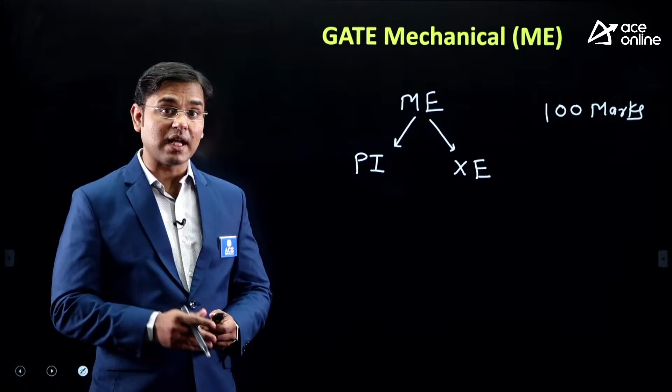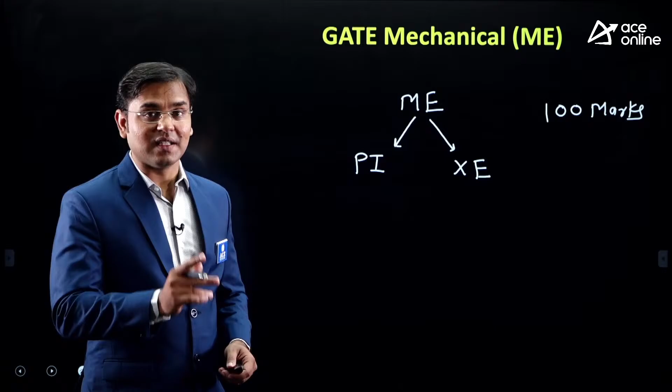The mechanical student can appear from PI as well as XE. I always tell my students, don't give the GATE examination from only one branch. Many students make the mistake of giving GATE from mechanical only, but they need to give the exam from both branches, ME as well as PI, or ME as well as XE. You need to go for two examinations, because giving only one exam is a little risky. You have two options.

Now you understood about all the branches. Now let's see, for mechanical, what is the subject-wise weightage for the GATE examination. This is a multiple choice question examination, total 65 questions are there, for 100 marks, you sit on the computer and give the exam. 65 questions are there, and what is the syllabus out of 100 marks?

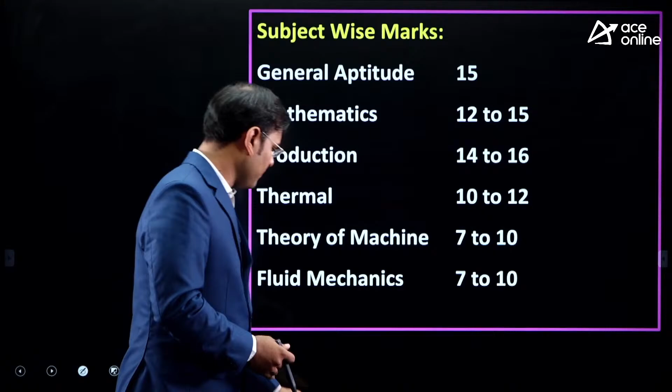You can see that aptitude is of 15 marks. General aptitude, what does that mean? Some English is there and some aptitude is there, and that combined weightage is 15 marks out of 100.

So just consider this: general aptitude, that is English plus aptitude, is 15 marks, and mathematics is also 15 marks. Then out of 100, the remaining marks is 70 marks. And my students, this 70 mark syllabus is the technical syllabus, the syllabus of mechanical engineering, your technical subjects which you are learning throughout your degree.

The first important subjects are mechanics, strength of material, theory of machine, thermodynamics, IC engine - a number of topics are there, manufacturing process 1 and so on. All this syllabus is of 70 marks, that is the technical syllabus, and now we have to discuss the respective subject weightage.

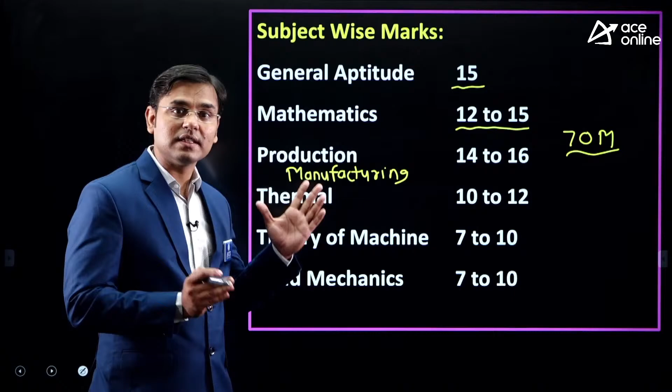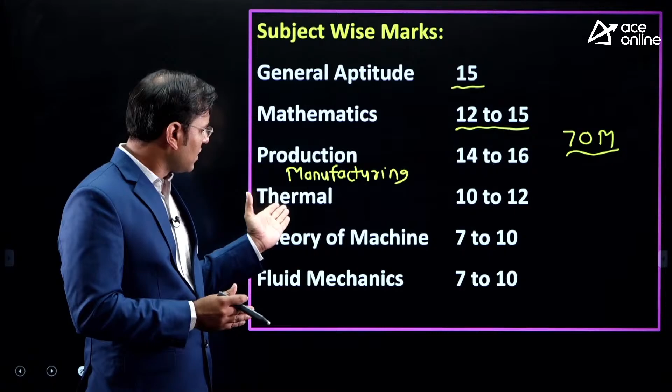In this session, we have to see in detail about the weightage and what type of questions they are going to ask in the manufacturing subject, for mechanical engineering as well as for students doing their degree in production and industrial engineering or simply production engineering. I will tell you how to study, how to prepare, and what will be your preparation strategy. And next, let's see the next subject, that is thermal - a very interesting subject.

In engineering also, some students, like in thermal subjects, understood that it is a part of thermodynamics. Thermodynamics, IC engine, refrigeration are the topics, and the weightage is 10 to 12 marks, very good weightage.

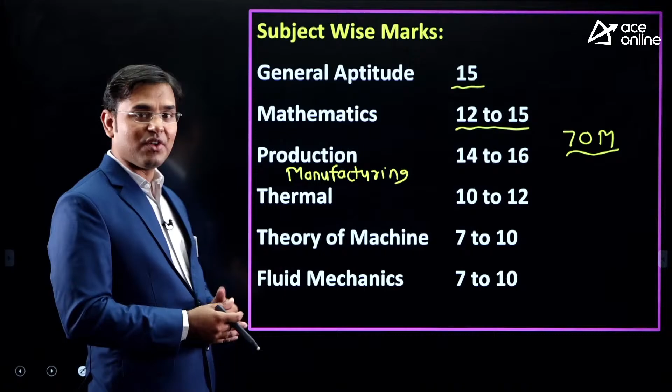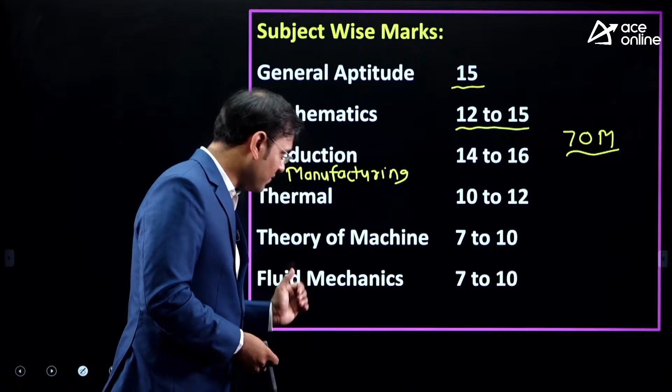Next is theory of machine, a very big subject - theory of machine 1, theory of machine 2 - total subject combined here, and that weightage is 7 to 10 marks. The next is fluid mechanics, weightage is 7 to 10 marks, and in that fluid mechanics the part of turbine is also there, the water turbine part is also there.

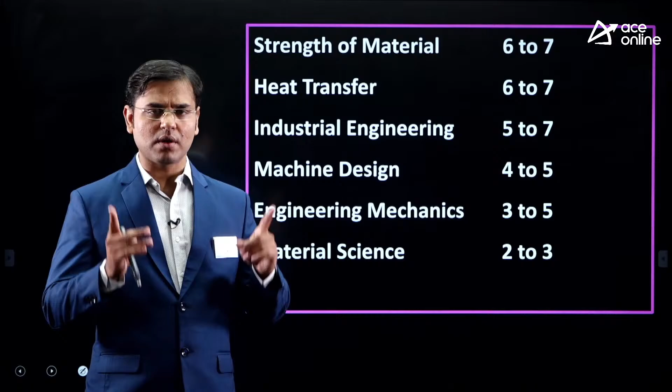The next is strength of material. Even though I am not the teacher of strength of material subject, this subject is very important for GATE examination. You can see the weightage - small subject, but the weightage is very good, as well as it is important after graduation for mechanical as well as civil engineering students. Very important for interview purpose. Either you appear for GATE exam or not, strength of material is very, very important for interview purpose for mechanical, production and industrial as well as civil engineering students, right?

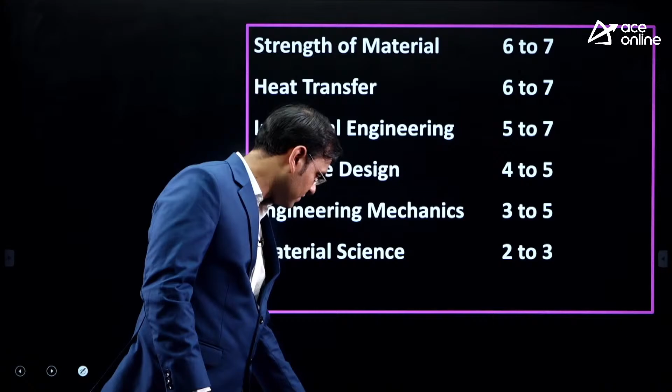The next is heat transfer, very small subject, the weightage is good, 6 to 7. Industrial engineering is a part of operation research subject. Many students learn operation research subject in their graduation, and the weightage is 5 to 7 marks. Next, machine design, 4 to 5 marks weightage. Engineering mechanics, the first year subject, 3 to 5 marks, and material science, 2 to 3 marks. Very interesting subject, material science is also there.

For the preparation of manufacturing, our today's topic is the preparation strategy for manufacturing. Preparation strategy for production subject, and for this subject, two subjects are important. First, you must have the knowledge of material science, then it is very easy to understand the manufacturing subject. You must have the knowledge of material science, then you can study very well this production subject.

Now see the very basic question for the student: which material is best for preparation? Which material we can use? This is a very basic question of the student, either for manufacturing subject or any other subject.

The first is classroom notes. Whatever I am teaching in class, whatever all the ACE faculty are teaching in class, these classroom notes are very, very important. All the teachers are giving very nice content, very nice notes, and the student needs to revise that notes a number of times. Either there is a GATE examination or an engineering services examination - engineering services examination, which is under the UPSC - we are teaching for that also, GATE as well as ESE examination.

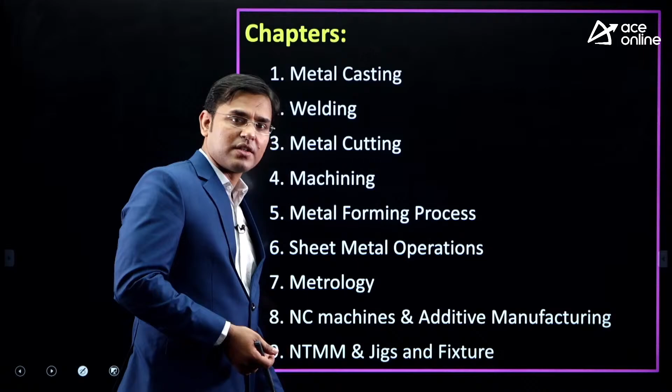Either it is mechanical or production and industrial engineering branch, here is the list of 9 chapters. You can see metal casting, welding, metal cutting and machining, metal forming, sheet metal operation, metrology, NC and CNC machines, and additive manufacturing, which is the newest topic added in GATE 2021.

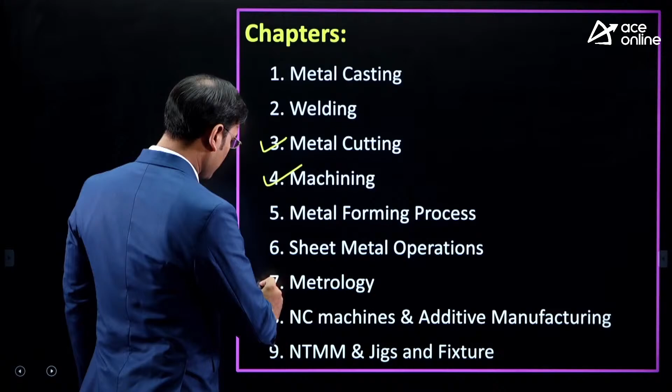And finally non-traditional machining methods and jigs and fixtures. Out of that, the preparation strategy of metal cutting, machining, and metrology subject - metrology is already covered in last month. Now the remaining 6 chapters' preparation strategy we have to discuss in today's session. One by one we will go through all 9 chapters. Again, the weightage for these 9 chapters is 14 to 16 marks for mechanical, and for production and industrial engineering it is almost 28 marks.

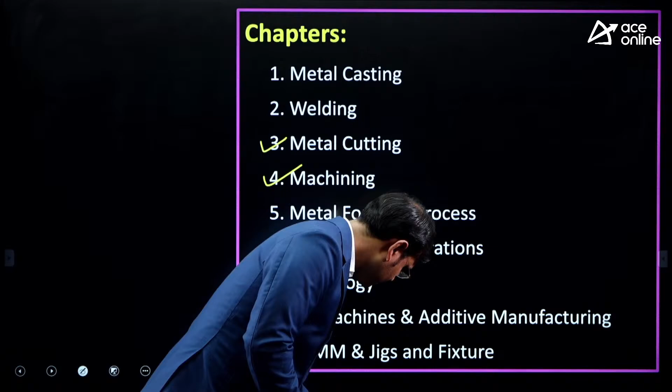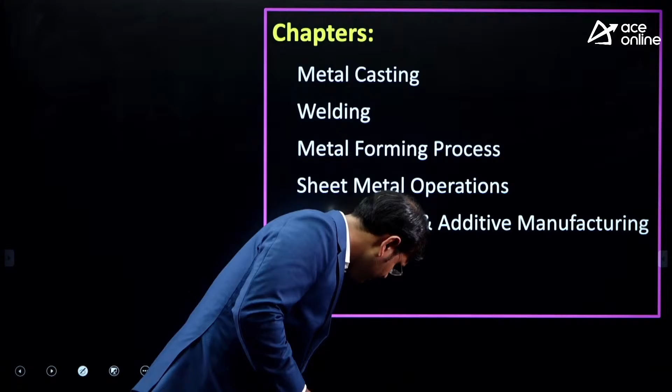Now let's see the list of all the chapters here. We have to discuss the preparation strategy for these 6 chapters. Now, among all these chapters, let's look at the first chapter, that is metal casting.

In the metal casting chapter, we simply take some solid metal and put it in a furnace. We convert that solid metal into liquid metal and pour it into a mold. After pouring into the mold, we wait for solidification. Because of heat transfer, that molten metal converts into solid material. Then, by breaking the mold, if the mold is made of sand, we can take out the casted component.

That metal casting chapter requires almost 20 hours to teach. Its weightage for GATE mechanical is almost 2 marks, and for PI the weightage is almost 4 marks.

In engineering examinations, students are studying only theory. But will they ask theory questions or numericals in the exam? That is a very big question. When we teach a chapter, we teach a lot of interesting theory, and along with that theory we also teach numericals. In this manufacturing subject, numericals are asked in the examination.

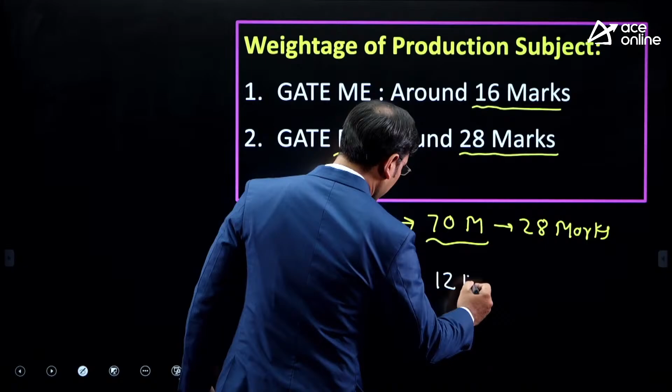Without the basics of theory, you can't solve the numerical. Hence, what I tell students is: study the basics, study the theory, and then start practicing a number of numericals. The total weightage here is 16 marks, and unbelievably, out of that 16 marks, around 10 to 12, or almost 12 marks, is weightage for numericals, with remaining 2 to 3 marks, maximum up to 4 marks, for theory.

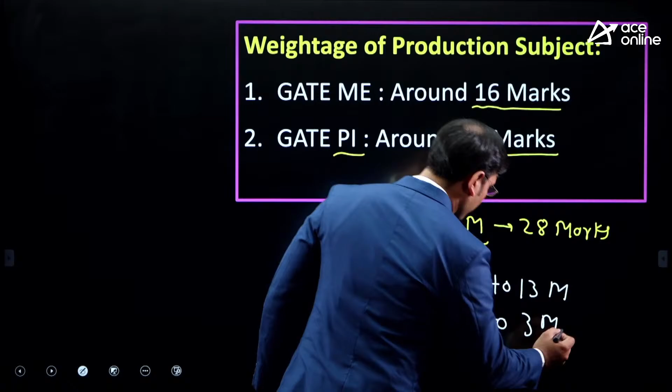They can do a 12 mark numerical and 4 mark theory, or a 13 mark numerical and 3 mark theory, but there's maximum weightage for numerical. One important thing: look at the number of reference books for this subject, but you still won't find the numericals there. For production and manufacturing subjects, numericals are not available in many reference books, but GATE is asking numericals, numericals, numericals. This high weightage of numerical is not only for manufacturing, it's for all subjects in GATE.

In the casting chapter, there are hardly 4 to 5 simple formulas. If you revise those formulas, they will ask either a 1 mark numerical or a 2 mark numerical based on them in the metal casting chapter. This is the first chapter we teach in this subject, and it's very interesting, taking around 20 hours. The same syllabus applies for GATE mechanical as well as GATE production, and if you study those 20 hours, you can put 2 marks in your pocket.

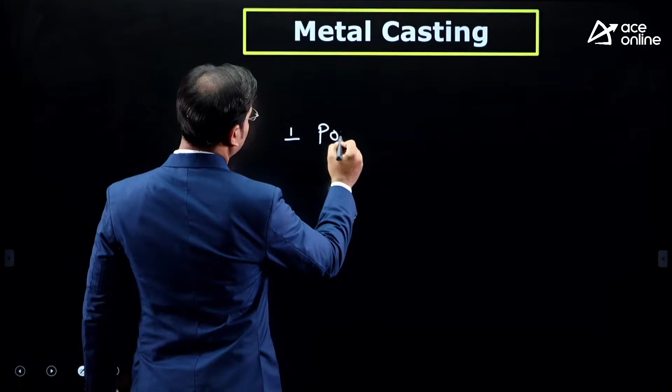How to study for metal casting: there's more weightage for numerical, but theory is also important. Let me tell you some points here. In this chapter, the first important formula is the pouring time formula. Second, there's the formula for solidification time.

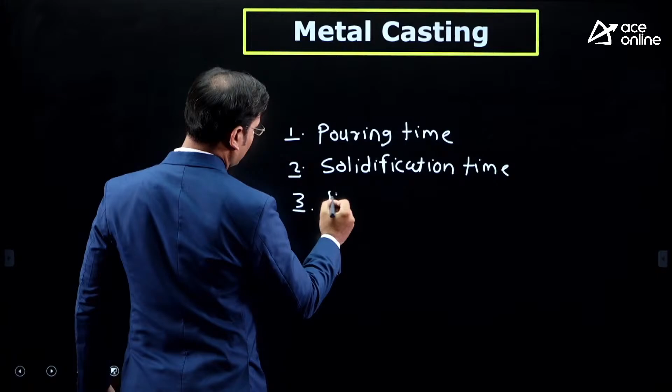Solidification time, and the third one is riser design. These three topics are very, very important for numerical.

And what about the theory? All the content is important for theory, whether it is mechanical or production. The same type of question they are going to ask on the casting chapter, whether it's mechanical or production and industrial engineering. But in PI, sometimes some tough numericals are also given for production and industrial engineering.

These 3 topics are very important for the numericals. And what is the theory? Whole chapter theory is required to study to get theory marks. This was the preparation strategy for metal casting.

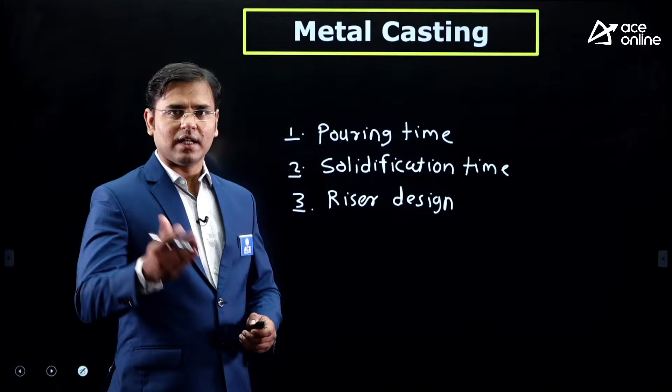Now see the welding chapter. This welding chapter is very, very tough chapter. Why is the welding chapter very tough?

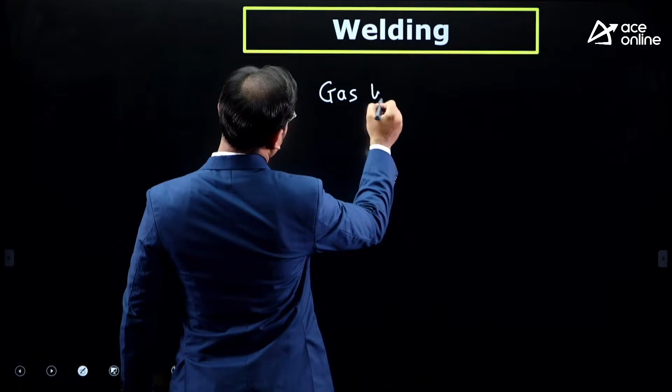There are a number of welding processes, such as gas welding. In that, only one gas welding is very, very famous, and that gas welding is known as oxyacetylene gas welding. Oxyacetylene gas welding is very, very important. A number of times in the GATE examination, they asked a 1 mark theory question on oxyacetylene gas welding. Number of times they asked this, so gas welding is important.

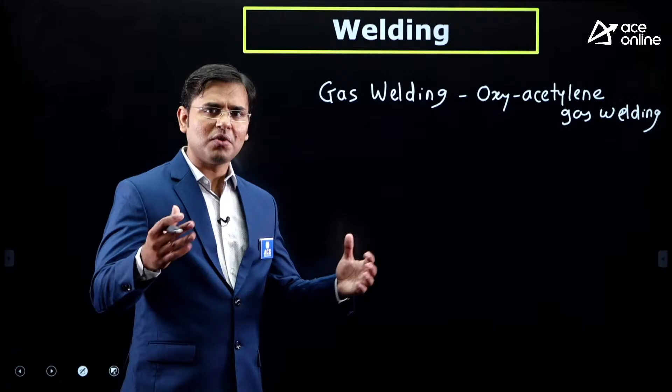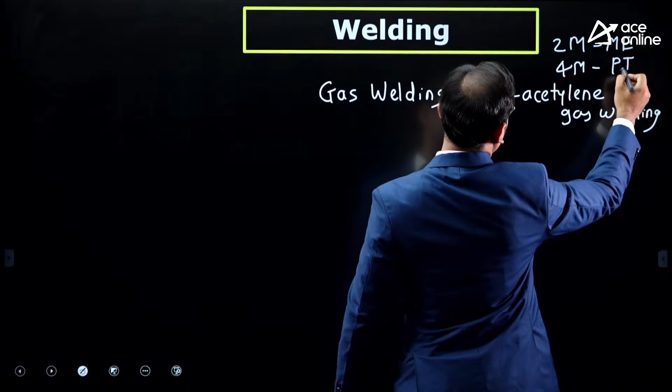Now the question is, sir, what is the weightage of the welding chapter? Same as the casting chapter, the weightage for welding chapter is 2 marks for GATE mechanical, and for production around 4 marks weightage. It may be 4 to 5 or 3 to 4 marks weightage for GATE PI, production and industrial engineering. This is the weightage.

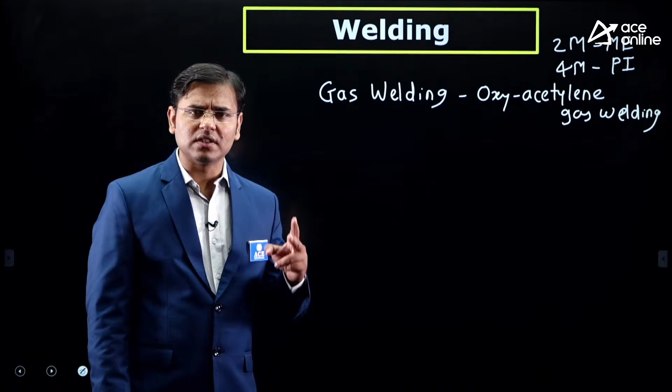In that 2 marks, same as casting, they can ask a 1 mark theory question and 1 mark numerical. What I'm saying is the 1 mark theory question and 1 mark numerical they can ask for mechanical, or directly they can ask a 2 mark numerical. And in every examination, they are asking the numerical on the welding chapter.

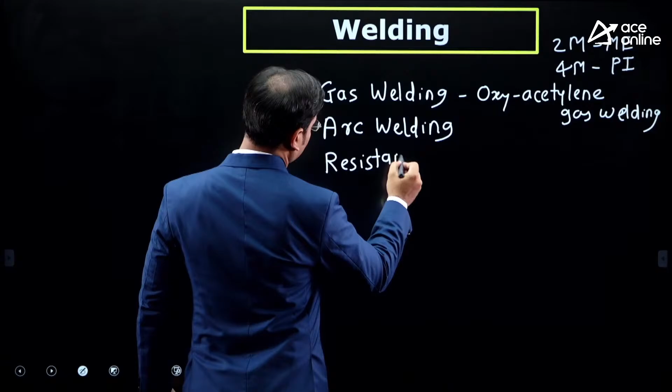Either there is arc welding or resistance welding. Out of these 2 weldings only, they are asking one numerical. Every year, every examination, they are asking that numerical for mechanical.

And if we have to speak about production and industrial engineering, in some examinations they ask the question on arc welding as well as resistance welding. Welding chapter is very, very important. Only 2 types of numericals are there.

This chapter also requires almost 20 hours to teach for me. Its weightage is approximately 2 marks. And from the starting of GATE examination, every GATE exam, they are asking the welding question. That's why it is very important.

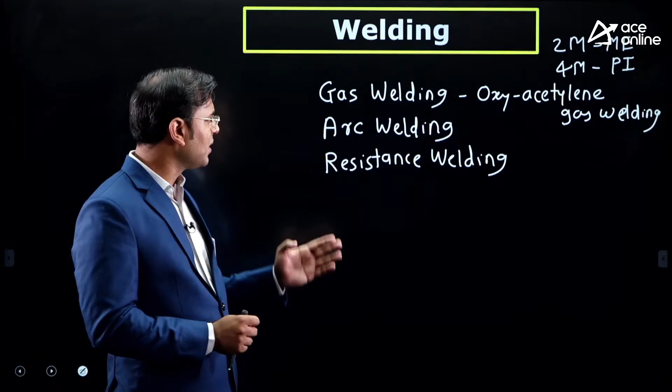I want to tell you that in the welding chapter, you need the knowledge of electrical engineering subject - the knowledge of voltage, current is required. Once you understand that, it is very easy, not that difficult, then easily you can solve the numericals of arc welding as well as resistance welding.

What I said is they will ask the numerical either on arc welding or resistance welding, but not only numerical - sometimes they can ask the theory on that welding also. Now again there are some topics in welding.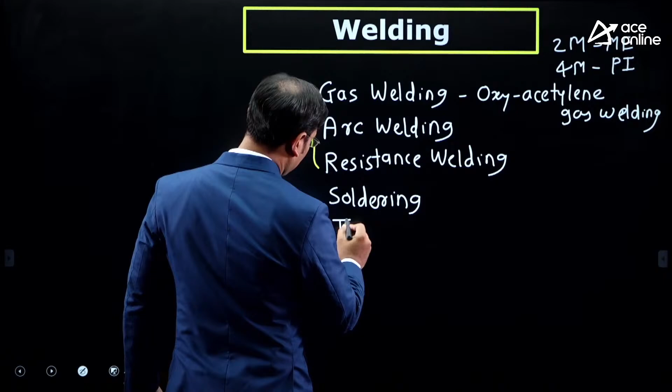Some topics are there, just like soldering, brazing and braze welding - this is one of the topics. The next one is Thermit welding, which is also one of the topics.

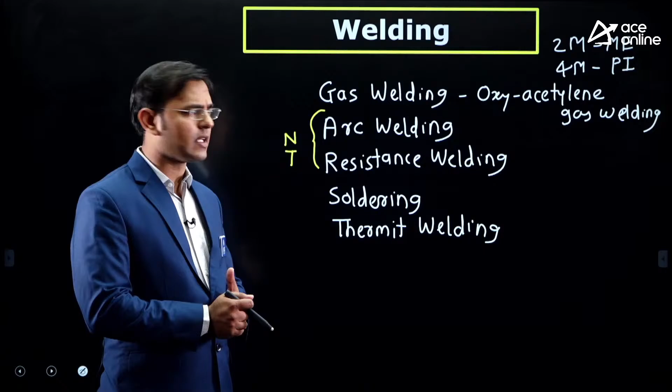Thermit welding, soldering - such 3-4 topics are there, from which they can also ask a 1 mark theory question. But there's great possibility on gas, arc, resistance - these 3 are very important, in which they can ask the numerical. That is all related to welding. Some formulas - arc welding has 2-3 formulas, and in resistance welding there's only a single formula. Very easy to get the 2 marks in the welding chapter.

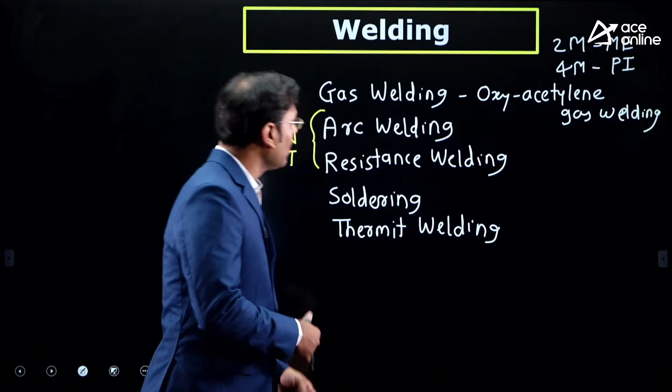Now we are discussing the chapters one by one, and after all the chapters there is one combined strategy to study all the topics, how to revise all the topics - that I will also tell you at the end of the lecture.

Now see, metal forming - this metal forming is very, very important.

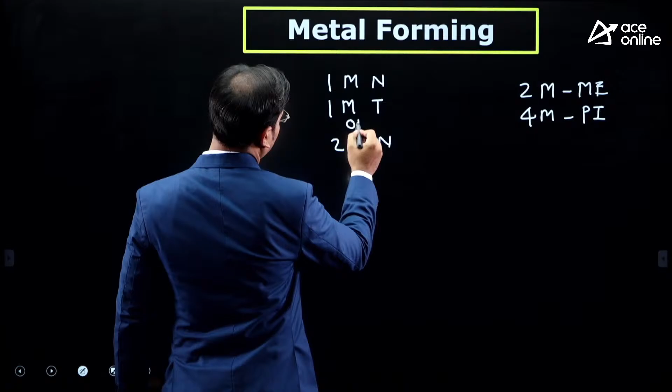That metal forming is a very important and very interesting chapter. Number of methods are there in the metal forming chapter, and the weightage is around 2 marks for GATE Mechanical and around 4 marks for GATE PI and Production and Industrial Engineering. In metal forming, they can ask a 1 mark numerical, 1 mark theory question, or they can directly ask a 2 mark numerical. Yes, anything they can ask.

Again you can see that the weightage of numerical is more here.

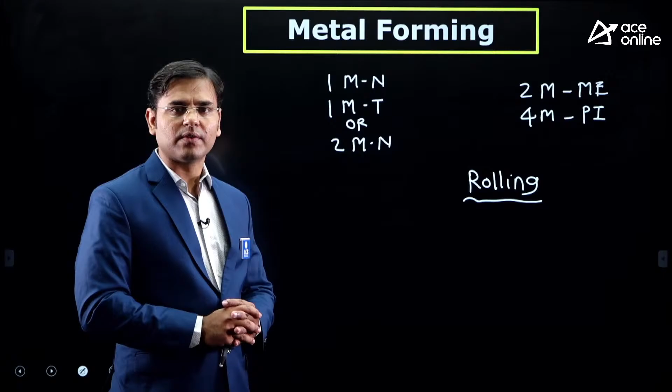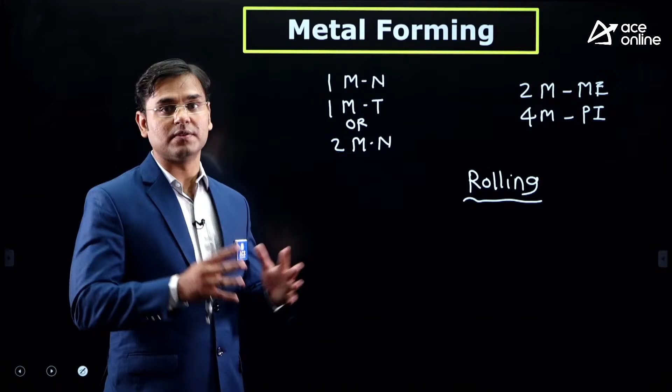In metal forming, the important topic is the rolling process. Rolling is a very important topic on which there is more possibility to ask a question. In metal forming there are various processes, such as rolling, wire drawing where we form wires, tube drawing where we form tubes, extrusion where we form pipes and rods, and forging. All these methods are important, but rolling has a big possibility to get a 2-mark question.

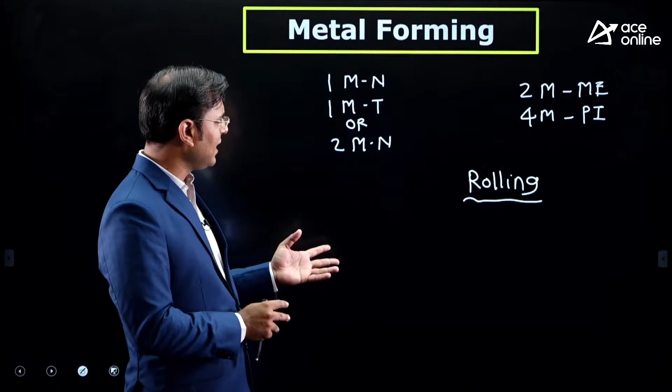But in many examinations, they also ask questions on extrusion, and they also ask questions on forging.

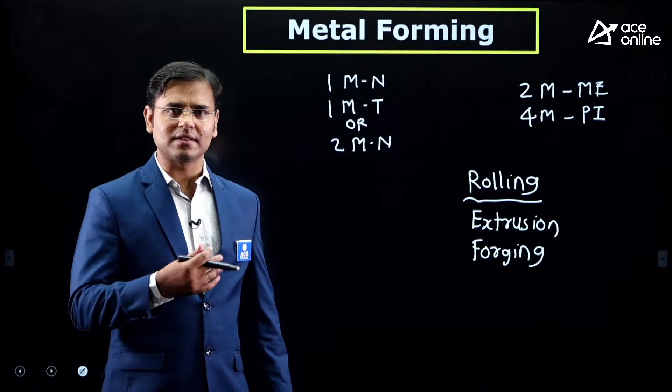And when I am speaking about forging, I remember the connecting rod. The connecting rod is a very important component, which we use everywhere in bikes, trucks, and buses. That connecting rod has very high strength, and it is made by the forging process only.

So this is the metal forming chapter. You got everything here.

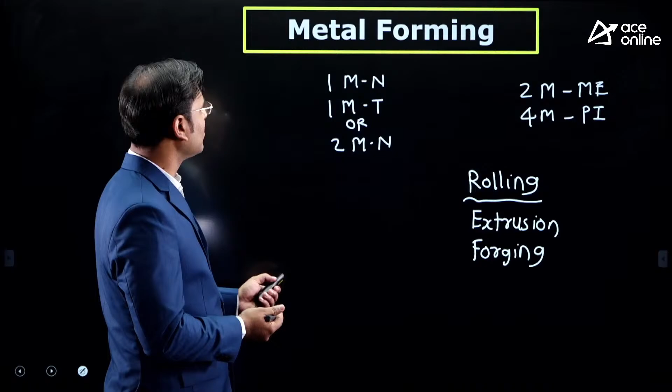The next chapter is sheet metal operations, meaning punching and blanking operations. I am writing this as a separate chapter here, but metal forming and sheet metal operations can also be combined. On this chapter too, they can ask a 2-mark numerical, 1-mark numerical, or 1-mark theory question. Combined, some examinations don't ask this question at all, because it is part of the metal forming chapter only.

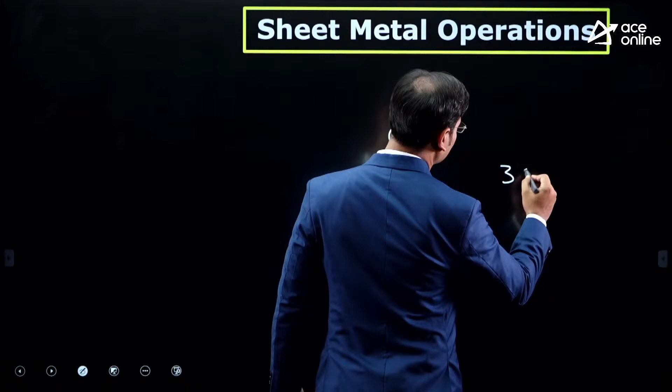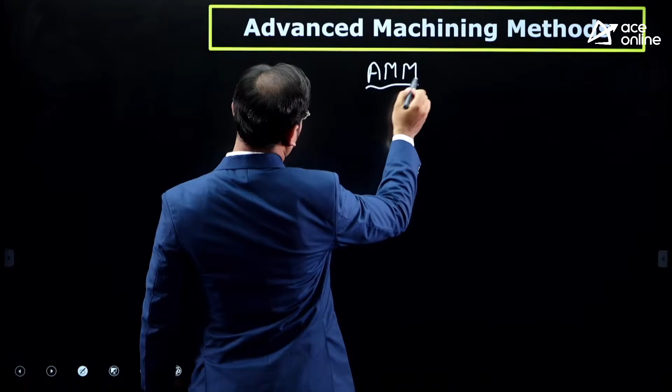Now the next chapter is advanced machining methods, that is CNC machines. Firstly, NC machines were developed after World War II, and then CNC machines were developed. In the syllabus for advanced machining methods, NC machines are there as well as CNC machines, and some part related to automation is there too.

Robotics is not in the GATE exam till now, but here, do you know what I am teaching the student? I am teaching how to remove the human being from the machining zone, meaning how complete automation is possible in industry. It's a very small chapter, but very important chapter.

The weightage is very good, 1 to 2 marks. This chapter is very small, but for GATE Mechanical and PI the weightage is almost twice, that is 2 to 4 marks, or 2 to 3 marks.

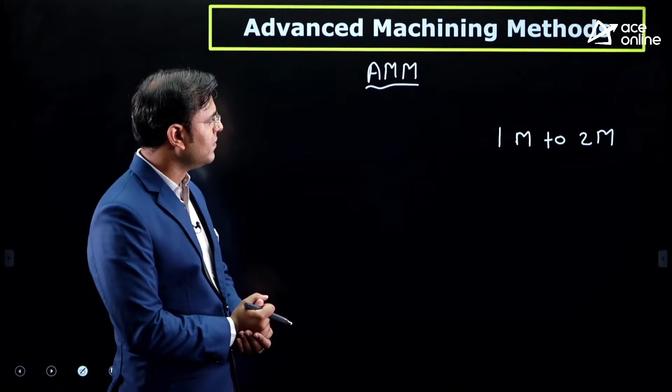Yes, now see here, in advanced machining methods, what I said, what I am teaching, is what is in the syllabus.

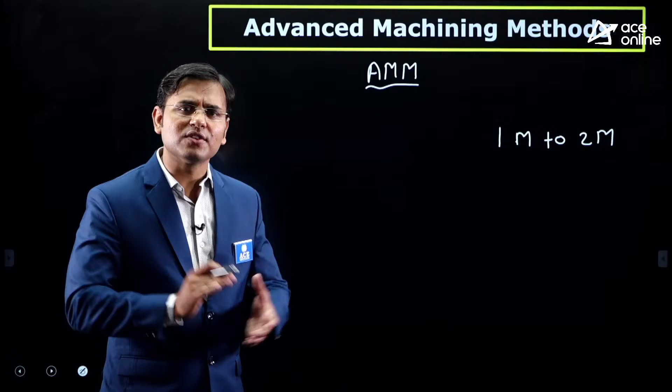In the syllabus, there's a topic on how to throw the human being out of the machining zone. I can't say whether it's good or bad, but I am teaching this chapter where we throw the human out of the machining zone. In that, you have to learn CNC machines, and very nice, easy numericals are available. Even a 7th or 8th standard student can solve these numericals. There are 1 mark and 2 mark numericals, and definitely I'm telling you, with minimum effort you can study this chapter.

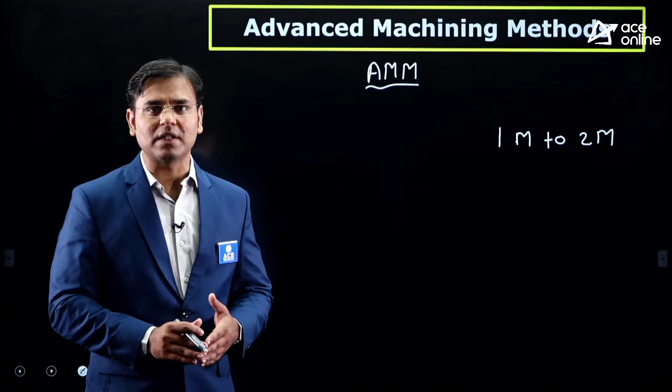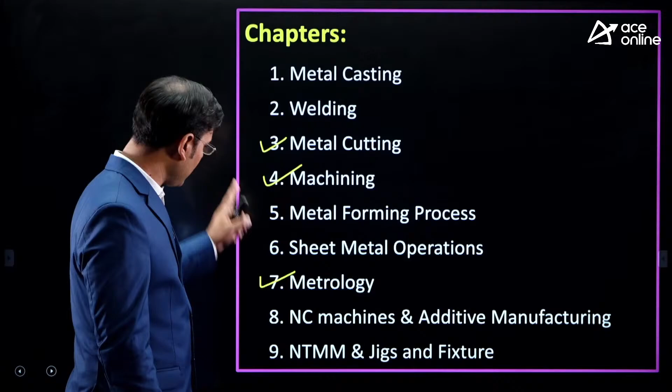Minimum effort as compared to all production engineering topics, as compared to all production subject topics. I showed you the list of total 9 chapters, and of those 9, this is a very small chapter. The topic is NC machines, or we can also call it advanced machining methods - these are the newest developments, and you'll see programming too. Initially we worked on lathe machines, then CNC machines were developed along with programming. In engineering, programming is very tough, but in the GATE examination, big programs are not there - very small, one-line programming is there. That's why this topic is very easy, very small, and the weightage is also very good.

So first there are NC machines, then second, CNC machines, then third, related to programming and automation. In this chapter, programming and automation covers all of that.

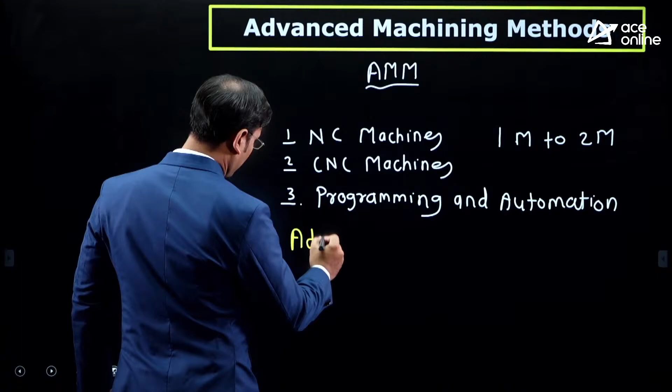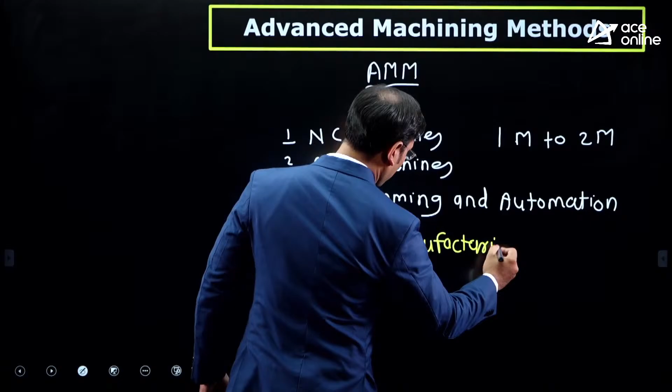But now, a new topic has been added in GATE 2021. The name of that new topic is additive manufacturing. Just believe that when it was added, they added it in the GATE 2021 examination only.

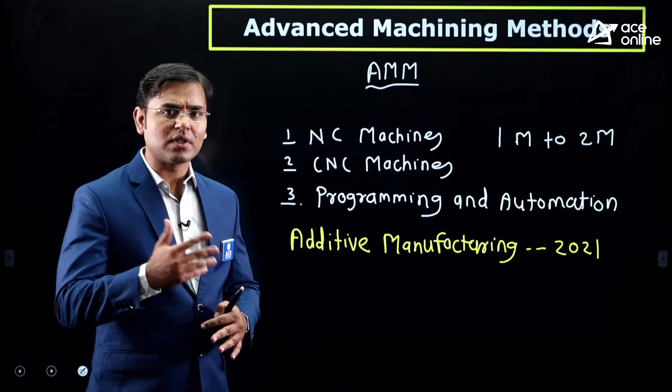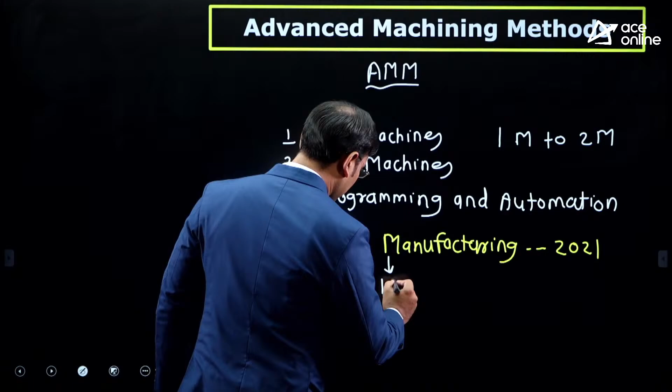But in GATE 21, they didn't ask any question on additive manufacturing. In GATE 22, for both mechanical and production and industrial engineering, this topic was added. For mechanical engineering, there were 2 papers - one morning session, one afternoon session - and in both sessions they asked one question, a 1 mark theory question. Only theory is there for additive manufacturing. There's 50% possibility, or I'd say more possibility. Hardly 6-7 small topics are there, and from those small topics they can ask a 1 mark question on additive manufacturing.

For additive manufacturing, till now only theory is available - no numericals are available, only theory questions. This is because it's a very recent topic. In all mechanical engineering subjects, if someone asks what is the newest development, the newest research, that research is additive manufacturing. In all of mechanical, production and industrial engineering, this is the most recent topic, and in our country, some NITs have specially started an MTech branch in additive manufacturing.

This is the most recent topic for mechanical engineering students - additive manufacturing. The patent and method development started around 1985, hardly 35 years ago, and it's still in the development phase. The research is still going on, so the number of numericals are not available, but there's a big possibility they can ask a theory question.

So I am writing the total weightage around 2 marks. They can ask a 1 mark numerical on NC, CNC or programming - very easy, all programming is very easy, and NC, CNC machine numericals are also easy. With 1 mark, they can ask an additive manufacturing question, or simply a 2 mark numerical, or 1 mark theory and 1 mark numerical.

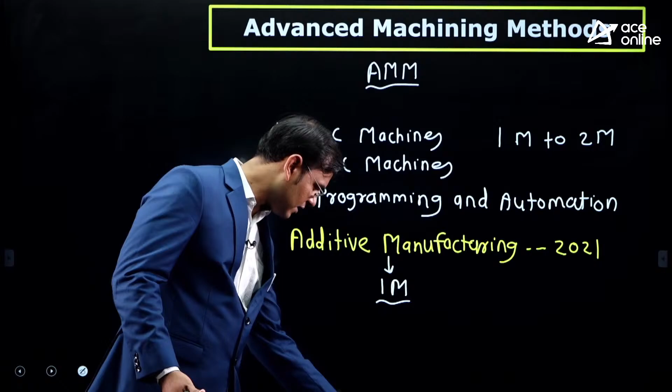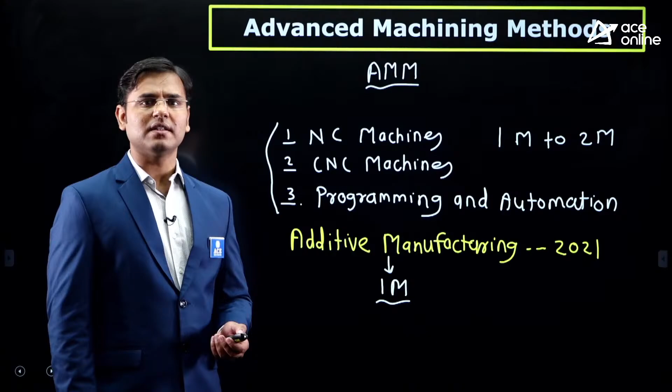Now see the next topic, non-traditional machining method. Traditional means old, non-traditional means newest. Now there is a big confusion between these two chapters: advanced machining methods, which include NC, CNC and additive manufacturing, and the non-traditional machining methods.

As you learn in mechanical engineering, there are a number of methods. I will tell you the names so you can remember them: ultrasonic machining, electric discharge machining, electrochemical machining, laser beam machining, and electron beam machining. All these 5-6 methods are the non-traditional machining methods, also called non-conventional machining methods.

On this chapter there is a strong possibility of a 1 mark theory question. This chapter is also very small, but the weightage is at least 1 mark. Sometimes they can ask a 2 mark numerical directly, or a 1 mark numerical, but there's a big possibility of theory questions.

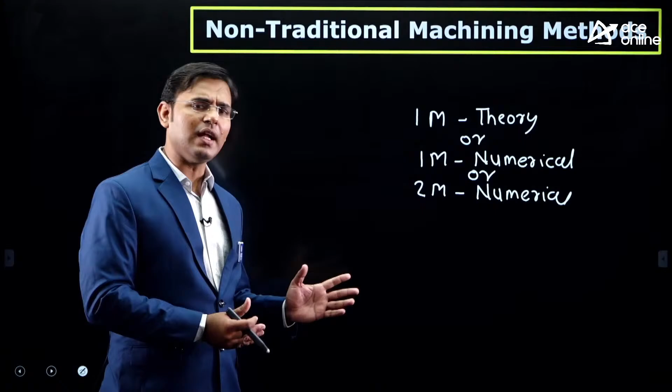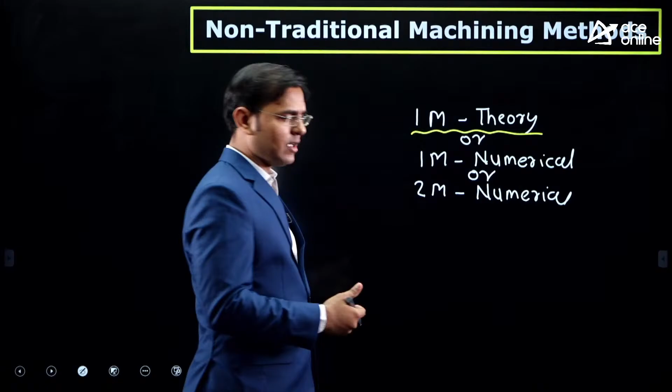This is a very small chapter but the weightage is very good. They started asking numericals only in recent times, in the last 10-12 years. Before that, only theory questions were asked in GATE. Now sometimes they ask 1 mark or 2 mark numericals as well.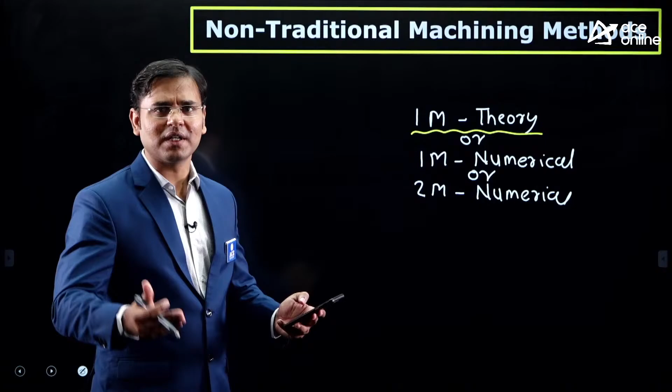Now many students have a question, sir, what is the difference between... okay, I got a very nice question here. Please wait, student, after 5 minutes I will give the answer to your question. In the same way, others can also ask me questions. If you are asking questions, I am very happy to give you the answer, as much as I know I will tell you all. Yes, other students can also ask me questions here.

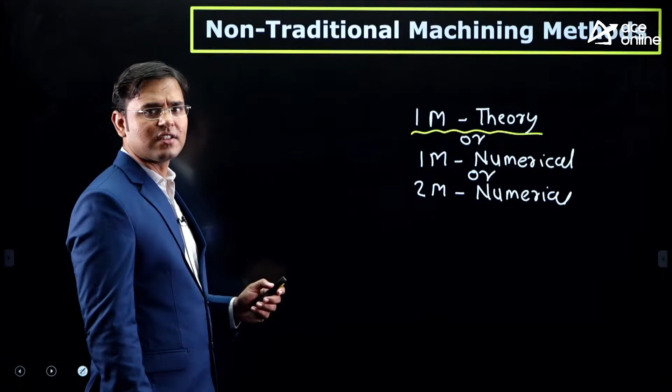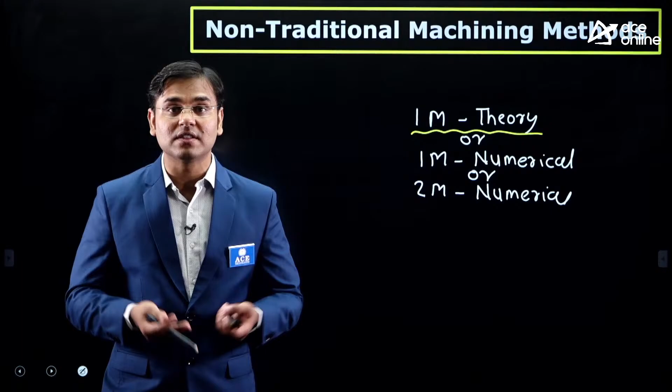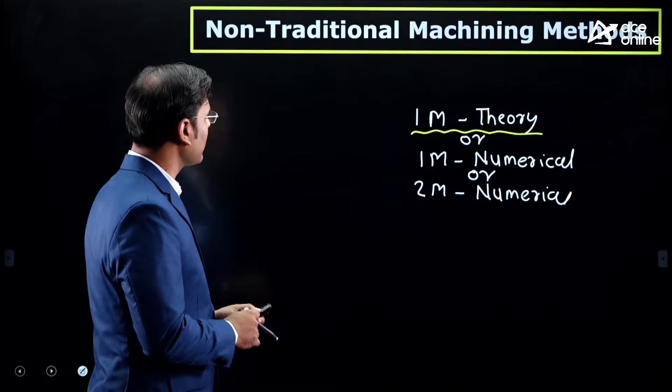Yes, this is all about non-traditional machining methods. Now I discussed all 6 topics - what is important, what is not important, all the things. You can again watch that video if you need some information from here.

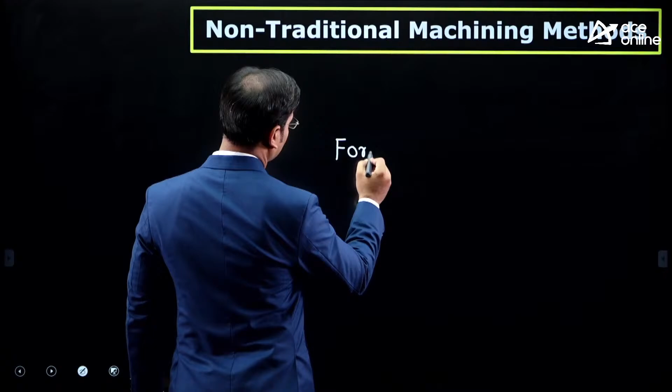Now one important thing I want to tell you for the GATE examination: just see the formula revision. Formula revision is the most important thing in the GATE examination.

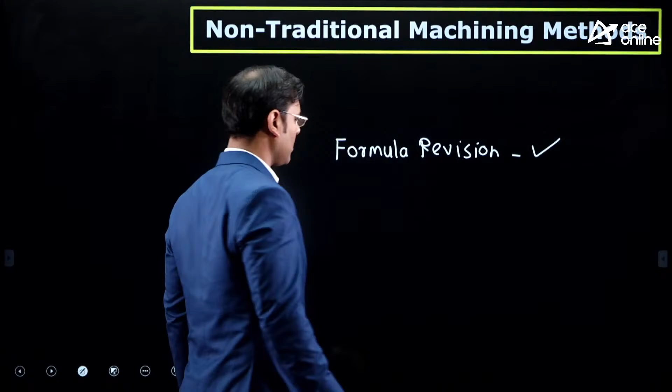Once you studied the casting chapter, you need to note down all the formulas present in that chapter in a register, and revise them on a daily basis. Second chapter is welding - when you study it, write down all the formulas on one page in a small notebook. For every chapter you need to write down the formulas, and revise them daily, in the morning or afternoon time, even after lunch.

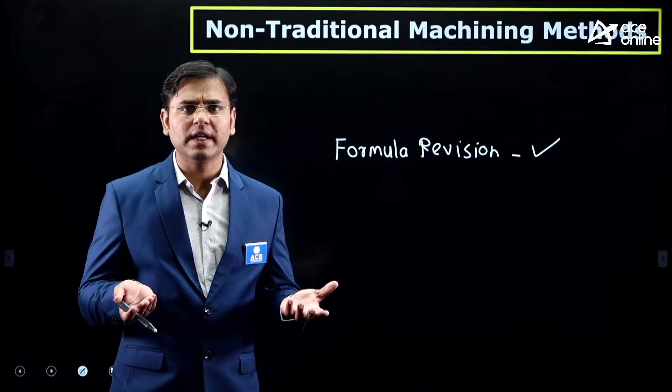While walking you can give the revision of that formula, you can remember that formula, because in this exam, any subject, the formulas are very important, and you must revise that formula on a daily basis. If you are not revising the formula, do you know what happens in the examination? You will write the given data and you will see here and there, thinking I forgot that formula. Without formula there is no GATE examination. Hence you must revise all the formulas.

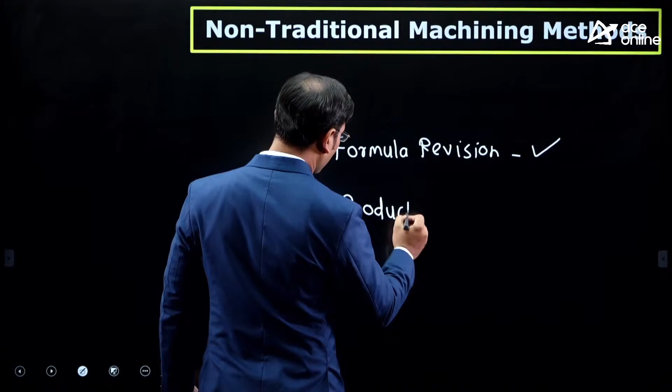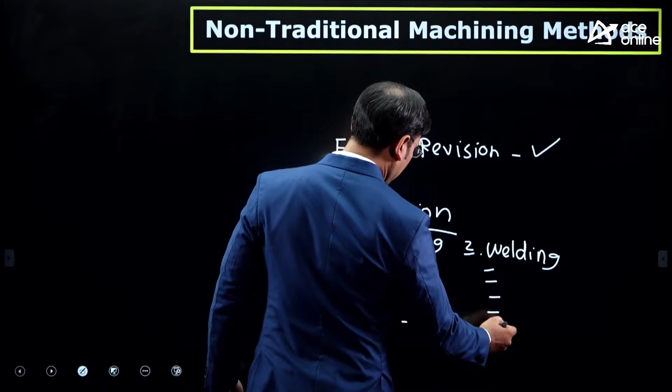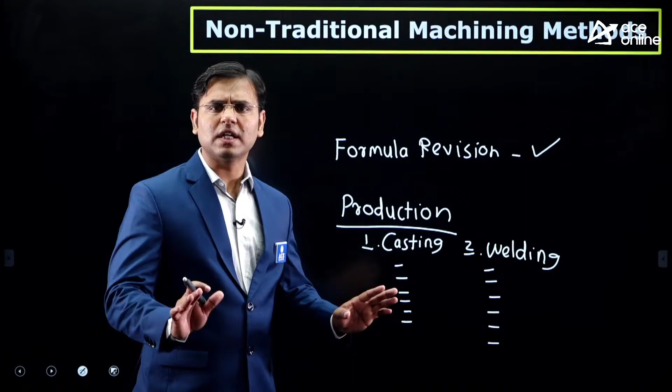Then you need to make one small notebook for the total production subject, and you have to write one by one. The first chapter is casting. After learning casting, you need to write all the formulas of the casting chapter. Then the second one is welding, and in such a way there are total 9 chapters, and for welding also you need to write the formulas. First you need to learn that chapter, and then you can write all the formulas, and that formula for all subjects you need to revise on a daily basis.